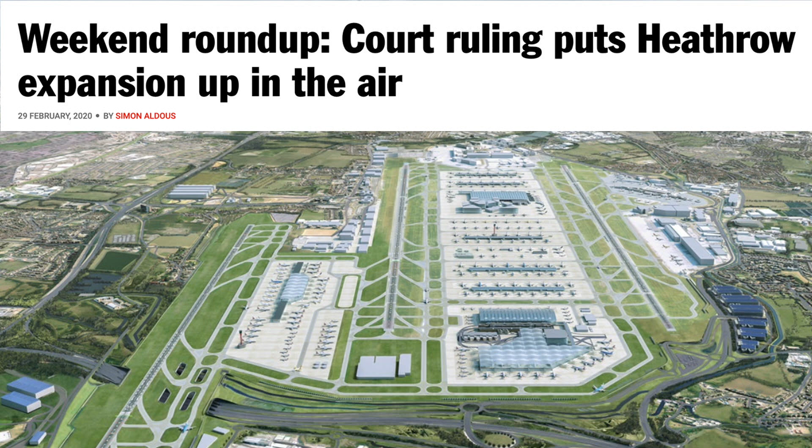Last Friday's news. So these really are quite different times for different people, a different sensibility. And even FutureBuild's branding is what it's all about.

And we have lots of organizations springing up out beyond the construction industry, but one of my favorites is close to my heart, which is the Architects Climate Action Network, who've got a stand across the way there.

Now, we now live in an environment where 75% of the population live in local authority regions that have declared a climate and ecological emergency. Now, if you work for those local authorities, your members are demanding a response to that, because they haven't done just a declaration. They then said, we're going to be net carbon zero in a decade, which is obviously impossible, but it's an ambition that's noble enough. And those local authority officers are running around at the moment saying, what the hell do we do?

So why should we care? Well, I care for these reasons. And I'm a bit scared about this sort of stuff. And this is a map I nicked from Vivienne Westwood.

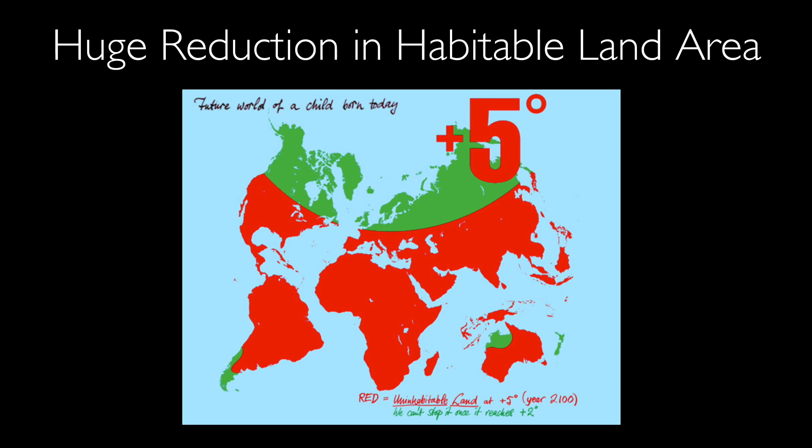And it shows what will happen to planet Earth quite crudely, very simple diagrams that I can understand, if we don't do anything. And we are not doing anything at the moment. We're thinking about it. And you can see that the red stuff is uninhabitable, and I think it's inaccurate because I can't imagine anything in Australia is going to be inhabitable if they don't do something soon, very quickly.

So why us? Well, in the UK we consume 600 million tonnes of stuff a year. Every year we generate 200 million tonnes of waste.

60% of that, or 120 million tonnes, is the construction industry. 45% of all CO2 emissions are the construction industry - the design, the building, the maintenance, the occupation, the demolition of the built environment. The construction industry also consumes about 50% of all raw materials that are mined and harvested every year.

So what next? Well, a lot of people are doing a bit of that. More people are doing a bit of this, and this is interesting because this is a cartoon my partner Ian Mackay did in about 1996 or 97, and we're using it a lot again. But I think some people are doing this.

Can we really afford to save the planet, or our bit of it, the bit that we live on? So from my point of view, humankind needs to learn how to manage planet Earth's resources, and it's all about that. And I think that it's designers and constructors and makers who are the managers of resources.

We manage resources. We choose what things are made of. And the talks that you're going to get during this day of people who've made very clear decisions about the specification of the stuff they'll use to make the things they want.

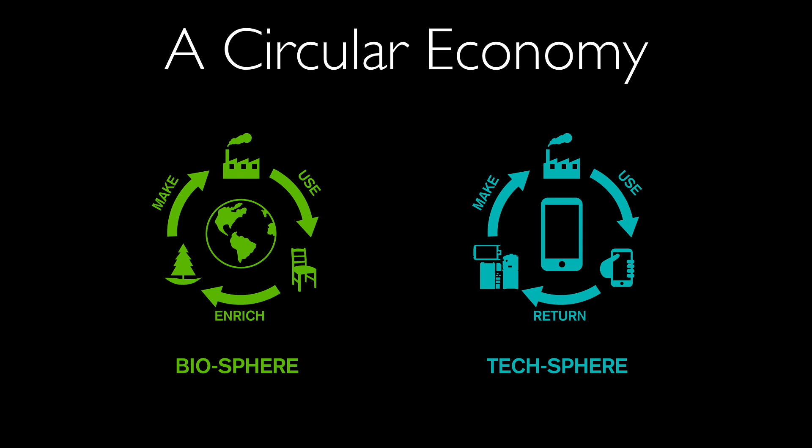So we have to drastically reduce our reliance on raw materials. And I think the circular economy provides many of the answers, and we'll be talking about this during the day today, where you turn those linear take, make, and throw away systems back on themselves so there's no such thing as waste, just stuff in the wrong place, and waste is actually not a word we use anymore, it's just a resource.

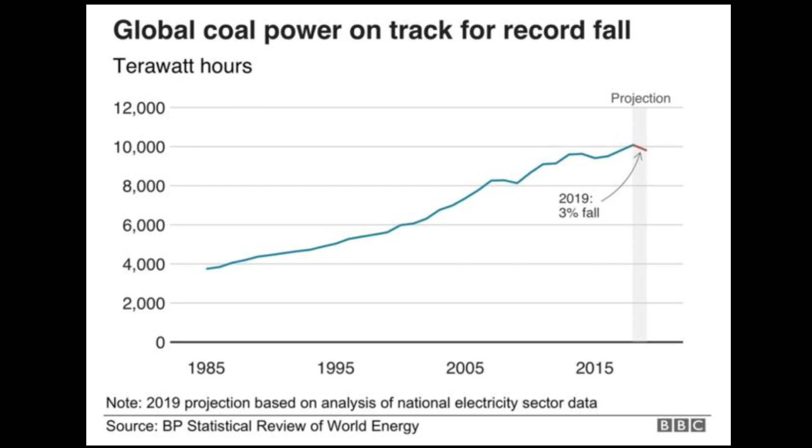Nobody's wanting to invest in coal anymore. And I think it's our city-states that are really going to move things forward, because that's where everybody lives, that's where all the stuff comes together, and that's where all these linear systems are near each other and can start to join up.

What I'm talking about, to conclude, is this idea of mining the Anthropocene—working with either replenishable organic material and nurturing the natural world by doing that, or more importantly, reworking the stuff that's already been made by humankind.

We're in a world where there's more gold in a ton of iPhones than there is in a ton of the best gold ore. So why are we sending people down underground? There's more copper above ground than below. It's above ground, it's the Anthropocene, the human-made layer of stuff that wraps planet Earth.

So mine the Anthropocene, close down the conventional mines, and nurture the natural world. And stop making sustainability the Mickey Mouse issue—this was a really good slide by someone working for the World Bank. I was at the Major Projects Association last summer.

I think we've got a different set of criteria. Consider refusing projects, Grimshaw and others, before you reduce the amount of materials you consume in your day-to-day business, before you start reusing, before you recycle, before you start specifying new materials. Our biggest challenge is not changing today.

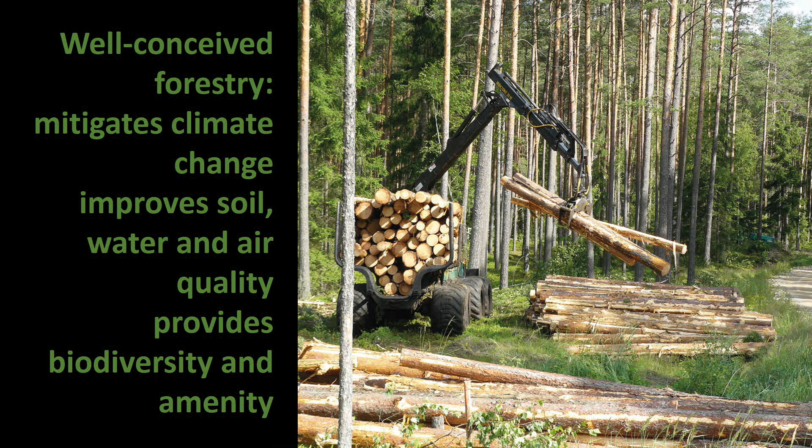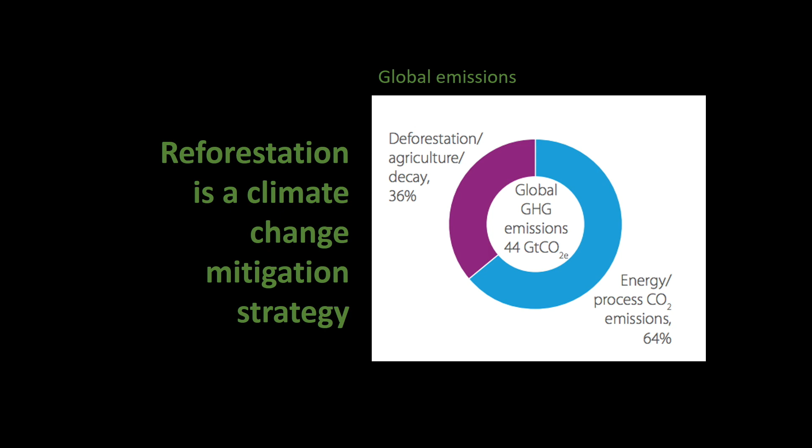So what's not to like? I challenge anybody to say it isn't part of the solution. And if you have any doubts, here's an interesting little pie chart. It shows man-made climate change, two-thirds being caused by burning of fossil fuels, one-third being caused largely by deforestation across the planet. Gives us a bit of a clue that trees might be part of the answer.

So I put it to you that timber is the exemplar material for modern, high-performance, critically healthy, low-carbon construction. People like to live in wooden houses, not just from the aesthetic aspect, but also the breathability of the timber and the systems create nice, good acoustic internal environments as well. Yes, you need good design, but it's the material that can achieve that the easiest.

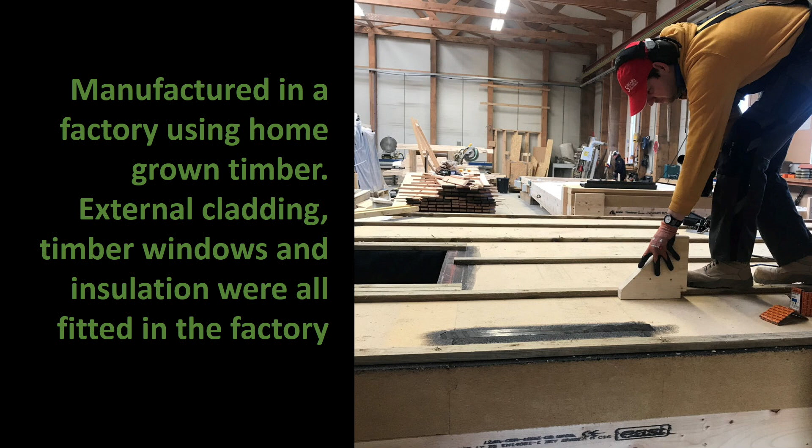Moving to off-site, so manufactured systems, there's quite a few shown here, factory-built, advanced solutions so that you can achieve passive house levels repeatedly over and over again, rather than reinventing a house every time we build one. We're moving to that. That can be done now, and is being heavily promoted in Wales.

The thing about using wood is it does two key things in terms of climate change, leaving aside the trees, which everybody knows is the only carbon capture and storage system that works on the planet. So, but by using timber, you displace the high carbon intensive materials.

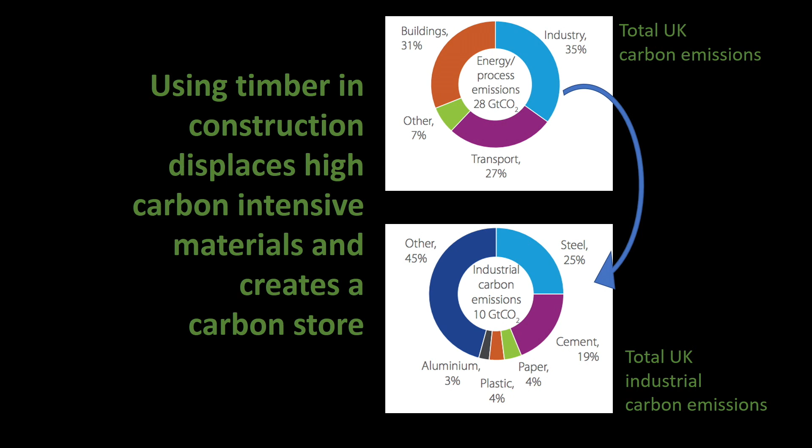The bottom one breaks down those industrial emissions into the different material sectors. And as you can see, steel is 25% of our industrial carbon emissions. Cement, even though we're largely a deindustrialized nation and not now producing much cement compared to China and other developing nations, is still 20% of our national material carbon emissions. So that's quite staggering. So it also gives a clue as to where some of the problems are. Now, this is a little bit tongue-in-cheek, and you could add glass to this list.

You know, these were the wonder materials, and are still the wonder materials for our industrial world. They give us all this utility, but should we be using them in low-value, high-volume applications? Should we be using them without thought to their carbon intensity?

They're fantastic, we need them. Steel, we clearly still need steel, but we need to use it more thoughtfully. We need to use it and reuse it, design for its reuse. Cement, we need to use less of it, using it only in those applications where nothing else will do. Plastics, clearly, well, that's highly topical.

Glass, you could add to the list. Should we be producing glass facades? Massively high carbon intensive facades that have about a 40-year life? No, we shouldn't. Windows, yeah, but not big glass facades.

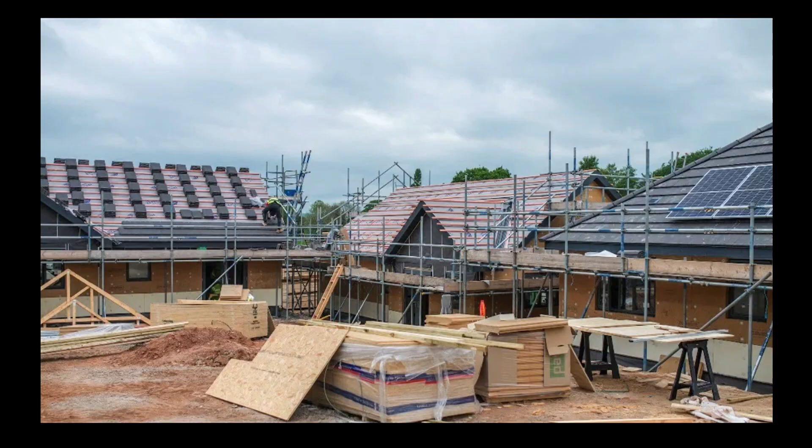So I want to finish up with a little project that we're working on in Wales. Wales is getting into this agenda in a big way, thanks to Wood Knowledge Wales, where we're bringing together public housing developers who build 1 out of every 3 houses in Wales, soon 1 out of every 2, committing to using timber and committing to delivering net zero carbon.

So this is a project, not a very good picture I have to say, but it's a project we're working on: 37 houses in Wales, a medium-sized development. This is phase 1, phase 2 starting next year, based on homegrown timber, wood fibre insulation, timber windows, local timber cladding, built to standard costs.

And what we're doing now is measuring the performance, both in terms of operational carbon and embodied carbon. We haven't done the operational carbon yet because they're not occupied, but embodied carbon we have.

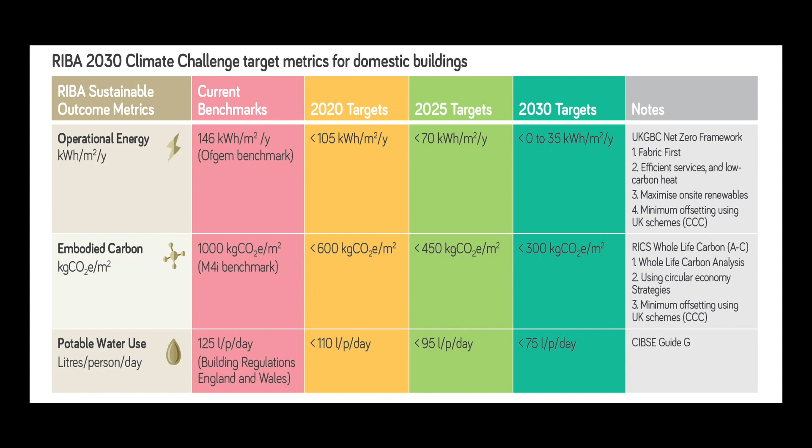These are the RIBA 2030 Climate Challenge target metrics. If you look at the embodied carbon, which is the middle row, we're particularly interested in the 2030 target for embodied carbon, which is less than 300 kilograms of CO2 per square metre. For the project I've just shown you, we beat that quite substantially, about 20%, using timber.

And I can't prove this to you here, but an earlier presentation on a stand said that timber frame, and using natural insulation, is the only way that we can beat the 2030 RIBA challenge target. I don't know about that, because all I've done is measured the project that we've worked on.

Embodied carbon is pretty significant, right? These show that on this particular project, it's about 50% of the total whole life carbon emissions from a project. So embodied carbon is unregulated, but it absolutely should not be forgotten. If we're going to deliver net zero carbon, we have to massively reduce our embodied carbon.

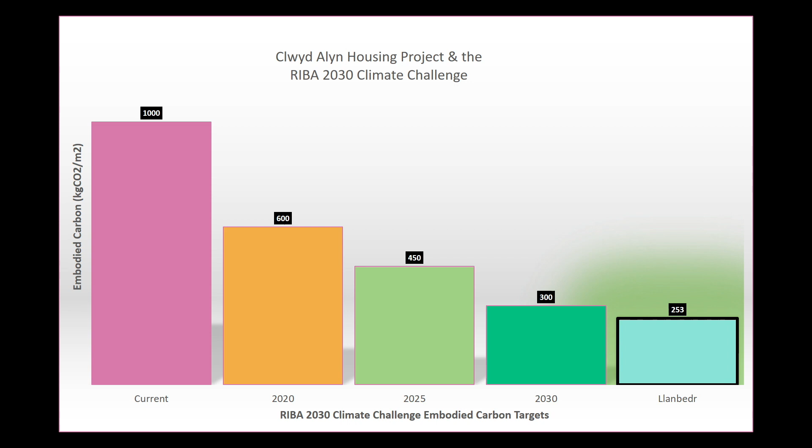And I would just mention, on the housing project we're working with the Housing Association, who are going to plant trees to offset their embodied and operational emissions over a 60-year life. We've calculated that the cost of buying the land and planting the trees is about 1.5% of the total development cost. So it ain't that great, it certainly can be done.

Just to finish up, I've got a minute left. I want to fly through some technical innovations which some of my colleagues speaking after me will talk much more about. But we're starting, in my opinion, at the golden age of the use of timber in construction.

You've probably seen projects made from this material, CLT, not just low-rise but also medium-rise projects, that replace nearly all the concrete you'd typically see used in construction. A colleague from Waugh Thistleton will talk much more about this in a moment.

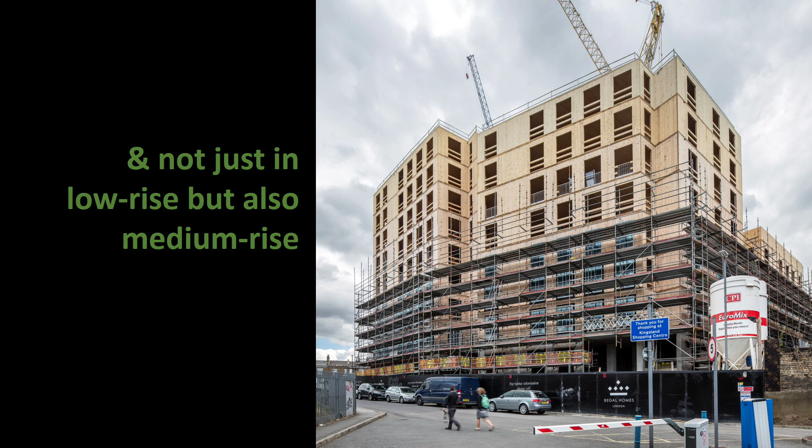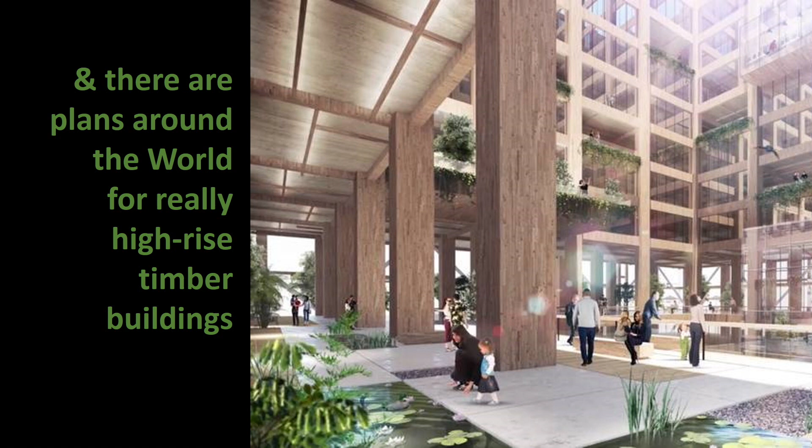We're also starting to explore ideas about super high-rise. This is a theoretical project, I don't think it's built, this is Sumitomo Forestry in Japan, but it gives you an idea of what might come. And we're not just talking about the structure, we're also talking about the insulation. There are also fantastic innovations in joinery, which a colleague will talk about shortly, making wood a much more durable material for window manufacturers and other external environments.

So, yeah, I would say wood is highly sustainable, and it is the only advanced industrial material available at scale right now that we could use more of and mitigate climate change at the same time. It's the material for the climate emergency. Thank you.

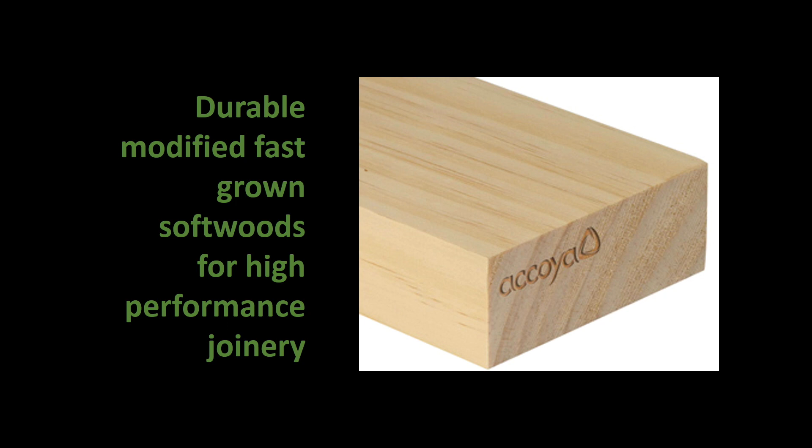Amazing facts and figures. Thank you.

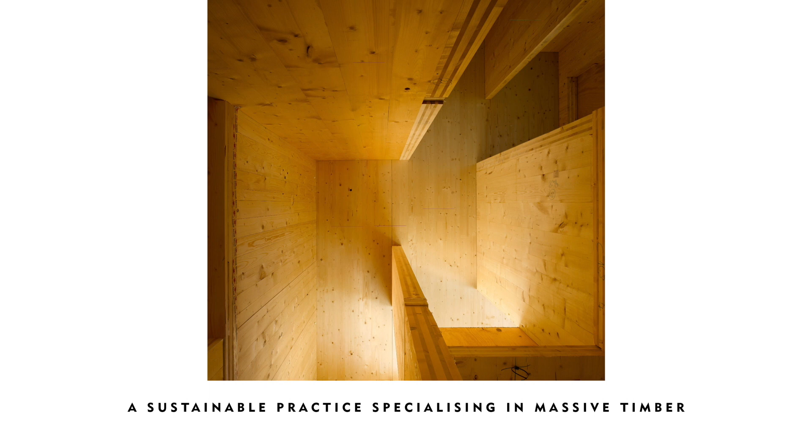Welcome, everyone. My name's Alistair, I'm from Waugh Thistleton Architects. We're a small practice of architects and problem solvers in Shoreditch, London, where most of our projects are inner city projects, offices and houses, and we specialise in trying to find the most sustainable way to design those projects.

Over the years, we've found that typically the answer to deliver the most sustainable project is to build in timber. That's led us to become world experts in building tall timber, and now we consult on building tall timber all around the world.

When we get a project, we look at it from the outside: what can we do to reduce? Do we actually need as much material in the project? Do projects need to be as big as some clients' ambitions set out for? What can we do to reuse as much material already on the site? What can we do to reduce the amount of material, and what can we do to enhance the project to allow it to be easier to recycle in the future?

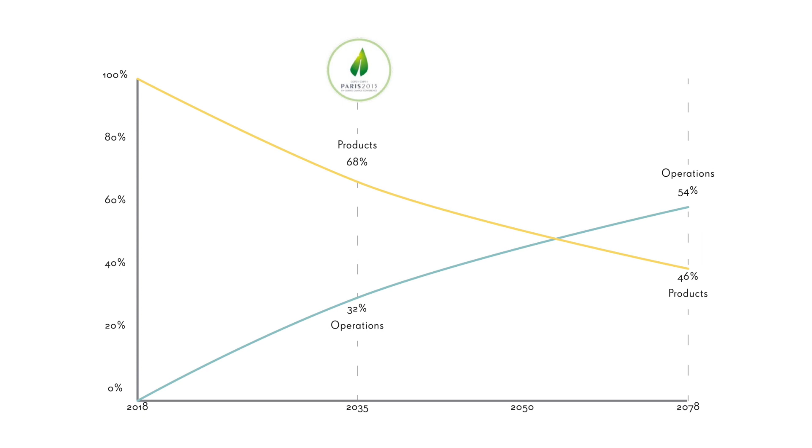Our main focus with carbon has been on embodied carbon, or as I'm increasingly hearing it called, upfront carbon. If we're to hit targets for 2035, 2040, 2050, whatever year people pick, these are really soon targets. We need to be worrying about what carbon we're producing today and what carbon we're using over the next 30 years. So we've really focused on how we cope with embodied carbon and how much carbon we can save today.

So why do we select timber for most of these projects? Because it's a renewable material. The forest absorbs CO2 from the atmosphere, gets turned into logs, processed into modern mass timber products, which can lock away that carbon for over 100 years into buildings. Once those buildings are demolished, the materials can be graded, recycled and reused, and those that can't be used for generating low energy, where the CO2 created feeds the forests. So it's a cyclical, recyclable, renewable material.

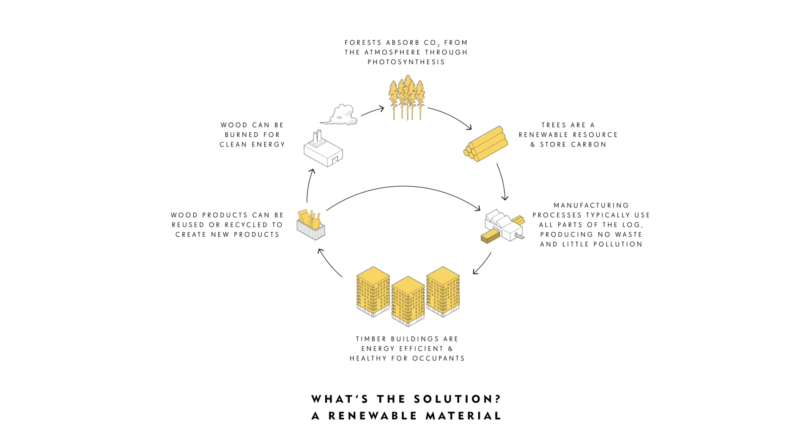So how much carbon can you actually look to save in a project? Some of these figures are based on A1 to A3 in a life cycle analysis. We've created a building typology designed as efficiently as we can in set materials—designed in timber, in steel, and in concrete—to show you the difference between the materials.

If you don't count any of the carbon sequestered in the timber—any of the carbon the tree has taken from the atmosphere, put inside itself, and locked away in the building—timber still has significantly less embodied energy than concrete. These figures are in kilograms of carbon equivalent per metre squared: timber is 180, concrete 220.

But if you do count the amount of carbon sequestered in the timber used in the building, you get a significant difference in how much carbon you're saving. You've got to consider how much carbon the trees have taken out of the atmosphere, locked in the timber, and then locked away in the building.

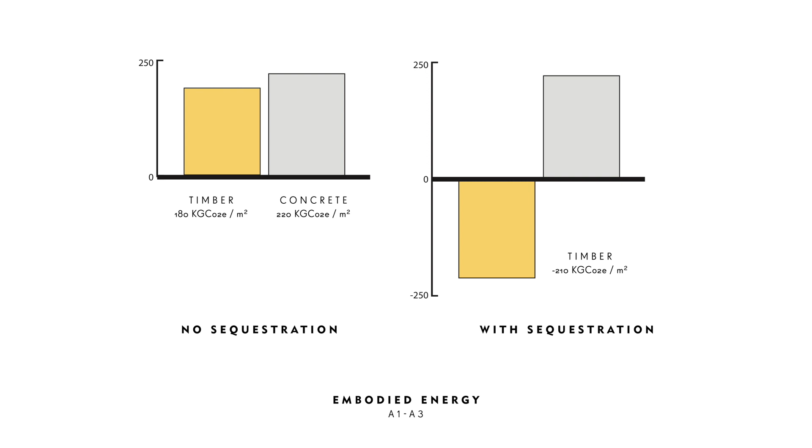What's also never counted is that if you're using timber from sustainable forestry—which is what we all specify in the UK, as it'd be very tricky to specify a CLT building made of non-sustainable timbers—typically FSC or PEFC state you need to plant at least one tree, typically two, but well-maintained sustainable forests actually plant up to five trees for every tree chopped down. So in that 100-year lifetime, even in 30 years, this chart shows how much carbon is sequestered in the two extra trees planted during the building's 30-year lifetime.

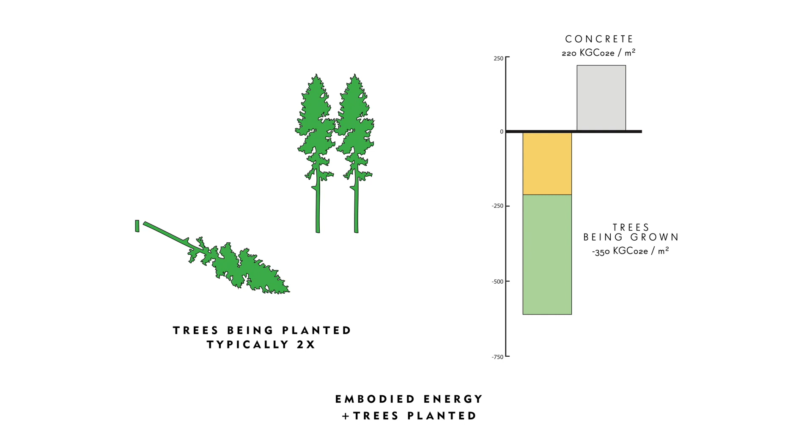And then, because we're not building a concrete building or a steel building, we're actually saving all that energy from carbon ever being spent. So the real carbon saving from building a timber building can be dramatic.

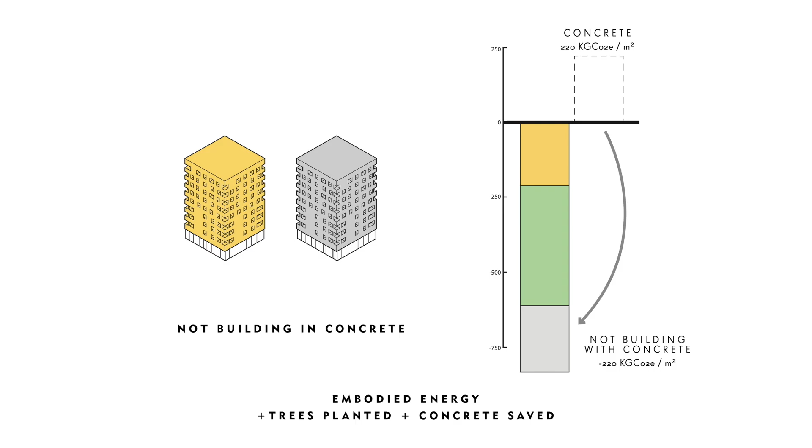So very quickly, what is CLT? CLT is taking standard softwood planks of timber, different species can be used, at different standard plank formats, and then cross-laminating them, sticking them together with glue under high pressure in alternate directions. This allows great stability and strength in panels, and means you can have panels of great sizes and thicknesses, providing great strength from small materials.

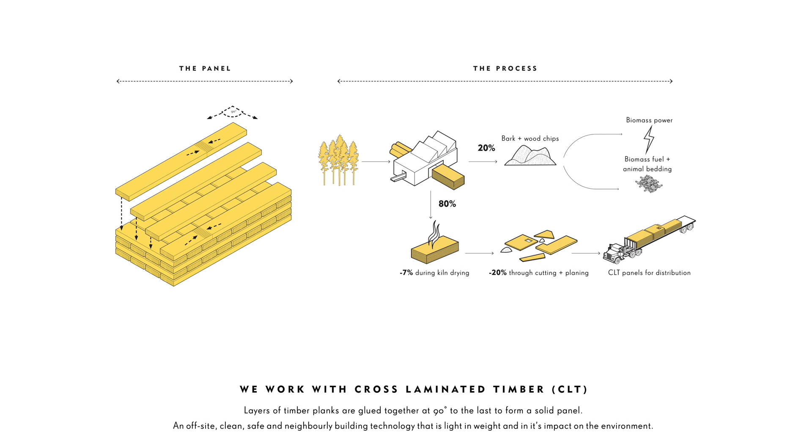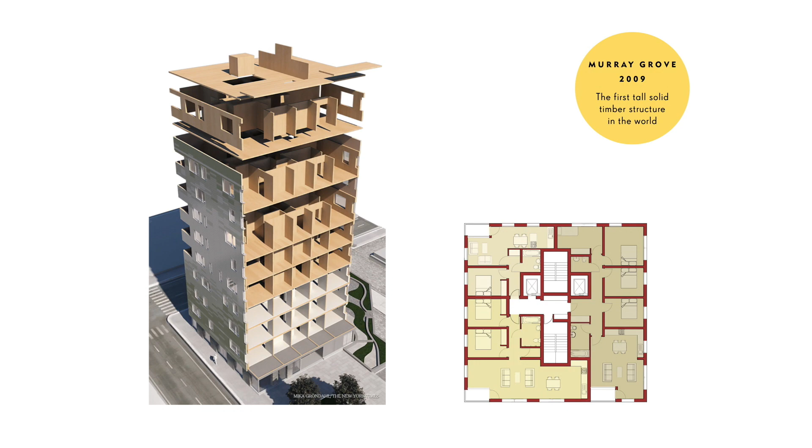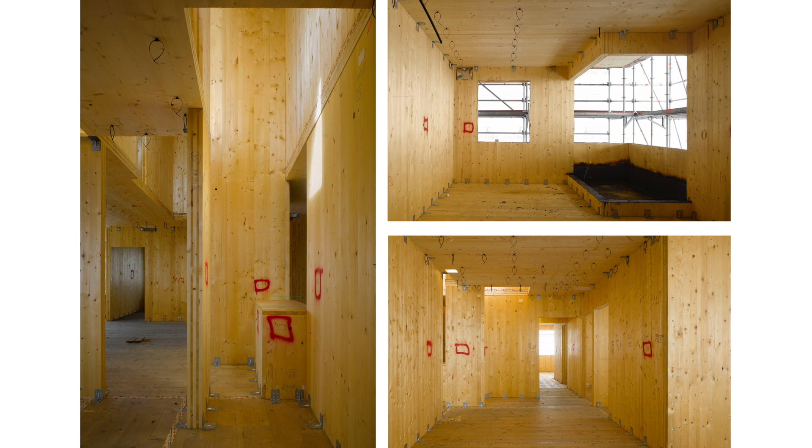In 2009 we finished a project called Murray Grove, 29 homes built all out of CLT in a honeycomb structure style, where all the walls are the same thickness, made from CLT. It took 49 weeks to complete, with 29 homes finished. It was quick to fit out because most of the internal walls were also structural, so when the main structure went up in 4 or 5 weeks, a big bulk of the work was already complete.

Since then we've been learning and creating more homes, but unfortunately the government changed the rules on how we can use CLT in buildings, so we've had to adapt how we design. We wouldn't be able to design this in the same structural way now, but what we're doing on current projects is making sure the facade is non-load bearing and completely non-combustible, while the rest of the structure is made out of timber.

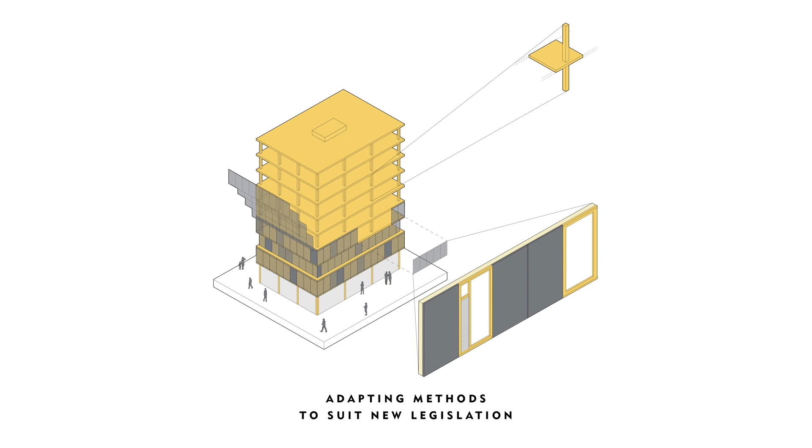Because we work in central London for commercially driven clients, it's only been recently, since the climate emergency has come forward, that clients have actually asked how to develop a sustainable building. Typically all our projects have been designed in timber because of the other commercial benefits, like delivering a 20% quicker program and up to 85% fewer deliveries, meaning less transport congestion in inner cities and lower transport costs.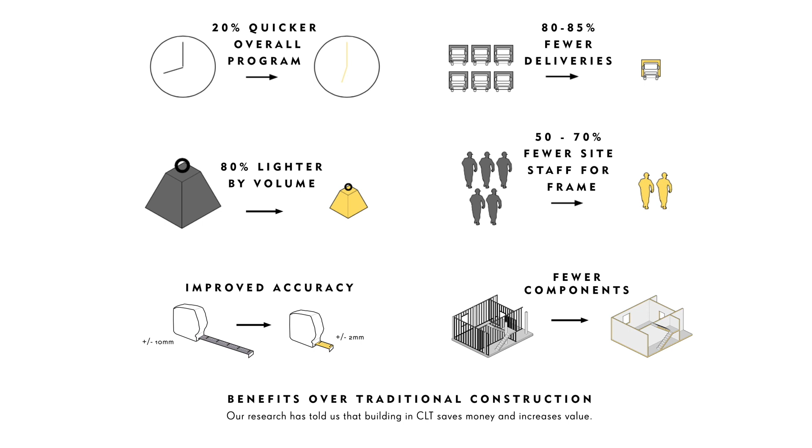It's also 80% lighter in volume, which meant for a building like Dalston Lane, built over a tube station, that if it had been built in concrete it only could have been 4 stories tall. We were able to deliver up to 11 stories because it was so much lighter. In concrete we'd have needed long pile foundations that would have interrupted the subway route, but instead we delivered the much lighter building on a concrete raft.

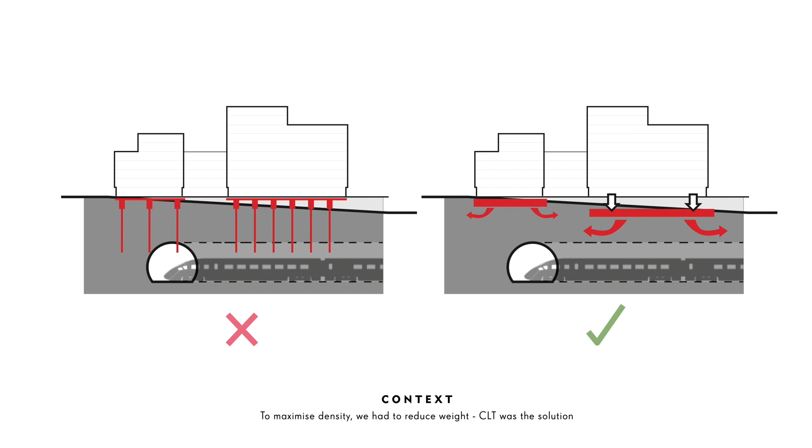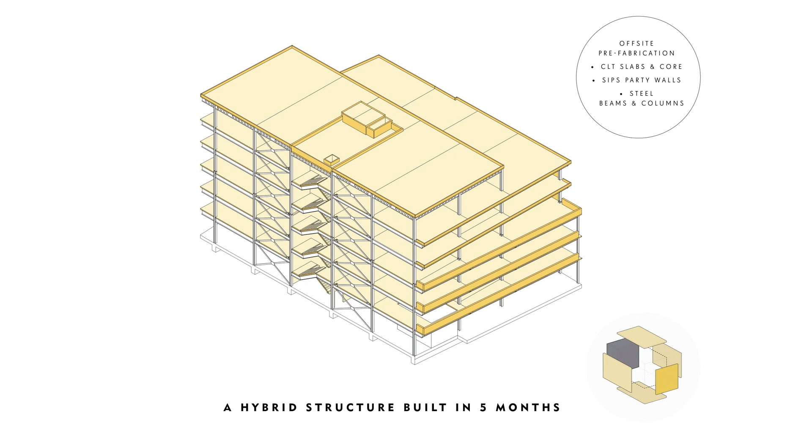This is a building we've just completed in Shoreditch, an office building using a hybrid of steel and CLT, where we try to use as much timber as possible. We used standard sections and bolted connection steels so the building is easily demountable, and when it is demounted, the steels could potentially be reused.

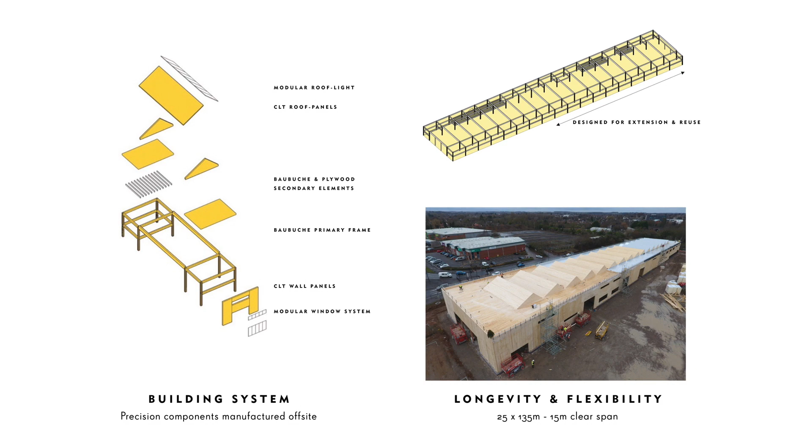This is a building we created for a furniture manufacturer called Vitsœ, where we worked closely with the client to develop a systemized factory building they could extend and demount over time. They hoped to build only 9 bays initially, adding an extra bay as the company grew and needed more space, all designed with them out of timber. As the project grew though, they decided to build it all in one go, which was a little unfortunate since we didn't get to test the growing and shrinking mechanism.

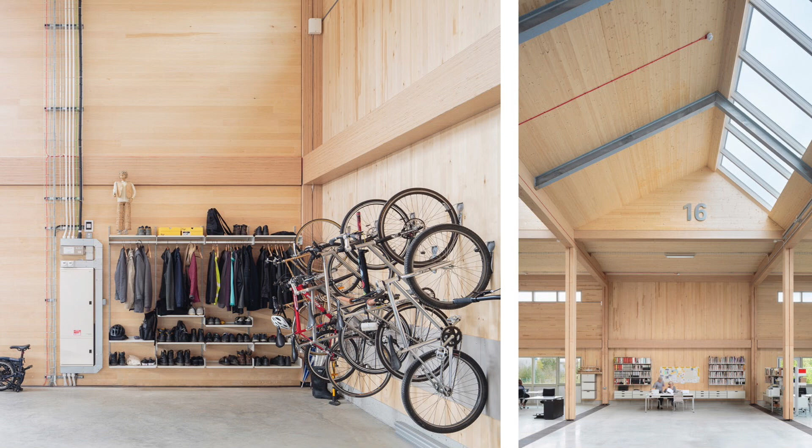This building uses a mixture of timber species in a typology that's typically steel and plastic, and we've been able to deliver a highly sustainable timber building instead. Some more pictures inside show it's a really nice place to work, so comfortable and serene to be inside. Everybody who works there loves it, I'm a little jealous I can't work there myself.

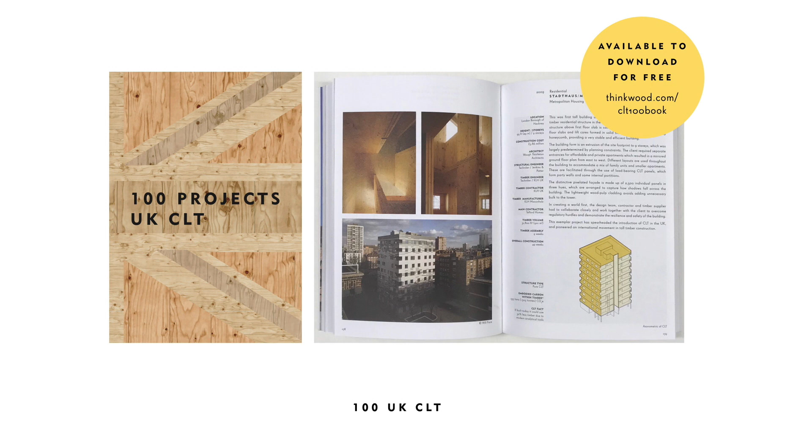While our government is currently trying to make it harder to build out of timber, internationally there are big strides to making more and more people take timber as their number one choice, looking for reasons why you can't build with timber rather than why you should. Actually, the conversation should be reversed, and everybody should be asking themselves why are they not building in timber.

The French understand this, the Americans understand it, the Australians understand it. Everyone's looking at how they can build more with timber, and we need to be doing the same.

Here's a little comic, which you can also find on our website, trying to explain how CLT can save the world. The idea is that we can create long-term carbon stores in the homes we live in and offices we work in, and encourage afforestation, so the more timber harvested from sustainable forests increases demand for timber, meaning more trees are planted and more carbon is sequestered. Then we can actually start making a significant dent into the carbon sequestration we need.

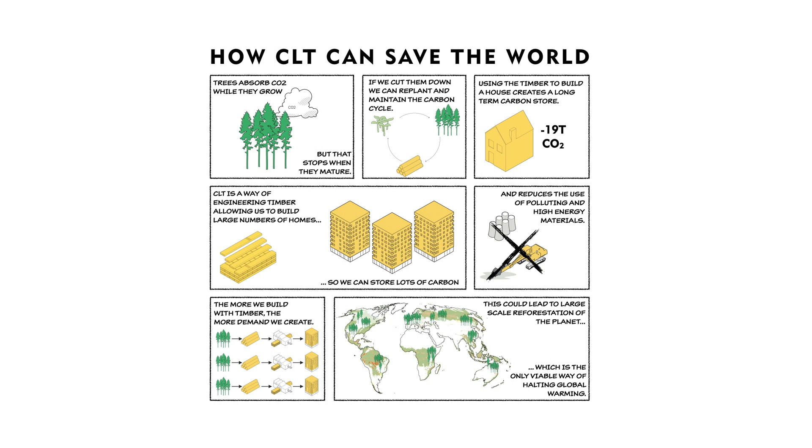Great, thank you very much. Thank you, Alistair. I think it's really interesting, a relatively small practice having a huge impact on the built environment and the world of design at the moment.

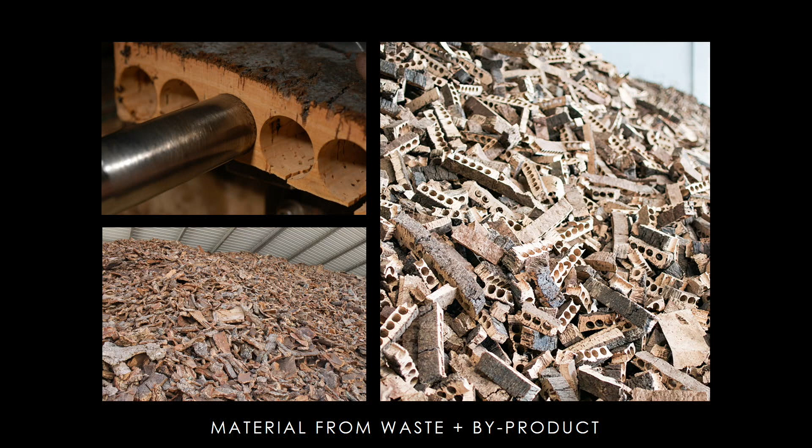The best cork from the harvest is used for the wine stopper industry, which then generates quite a lot of waste. And also there's a lot of general low-grade waste from the cork forestry industry, which isn't usable by the wine stopper industry.

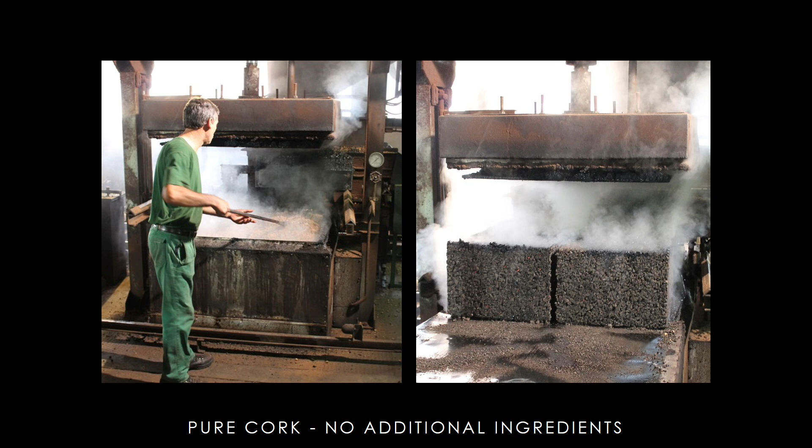That waste and byproduct cork is granulated, then cooked in big pressure cookers using dry steam at about 360 degrees centigrade, which is generated using waste biomass from the cork industry. As it's cooked, the granules expand and release a natural resin in the cork called suberin, which melts and bonds all the granules back together.

The lovely thing about expanded cork, different to agglomerated or composite cork which you see around lots of household products, is that expanded cork is a pure, biorenewable, plant-based engineered product. It's only made of 100% cork, no additional ingredients or binders whatsoever.

Because of that, it's already sold as a form of soil aerator, because it can be put straight back into the soil to biodegrade. As a result of that material life cycle, it's something approaching a cradle-to-cradle material, perhaps, where it comes from the forest, is used in the technical cycle as a form of engineered, pure plant-based material, and as a result can go back to the forest and regenerate new growth.

So those are the sort of characteristics that we were interested in maintaining through the life cycle of the building, throughout its use in the technosphere, if you like.

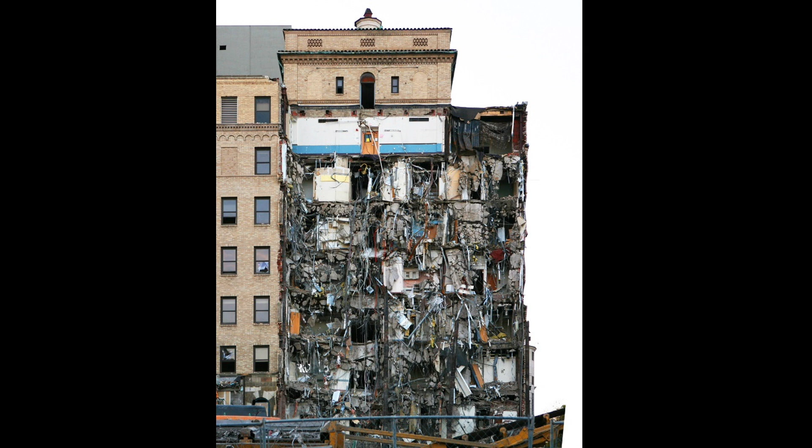A lot of contemporary construction ends its life like this. And that's largely down to the way that we have come to think about the way that we make buildings and put materials together.

It's always interesting, people talk about their brick house, and of course a lot of people know that brick houses are in fact an agglomeration of a whole range of interesting materials, from cement-based blocks, petrol-based foam insulation, foils, cement-based mortars, membranes, plastic insulation, and so on. This creates a complexity throughout the whole of a building life cycle, not just in terms of tracking resource impacts, but also at design stage, through to on-site complexities of sequencing and interfacing, aggregate performance in use, and particularly at the end of the building's life.

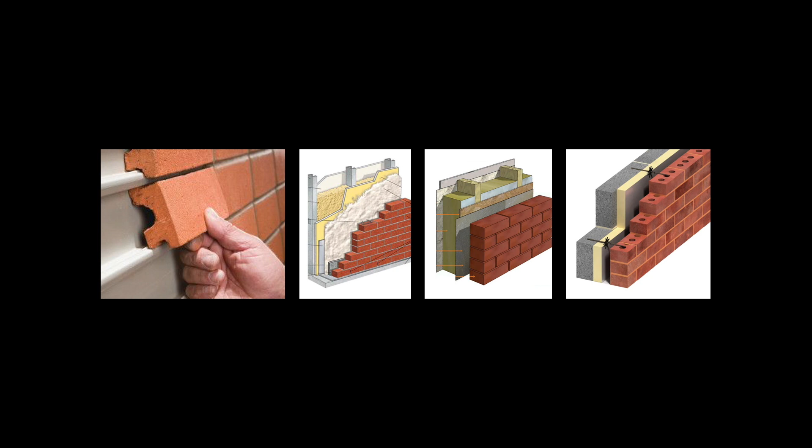We characterize that way of thinking about buildings as a complex, layered building envelope, where each function that the building envelope has to perform is fulfilled through a different product or layer, if you like. So structure, insulation, cladding, weather tightness, air tightness, internal finishes, and so on.

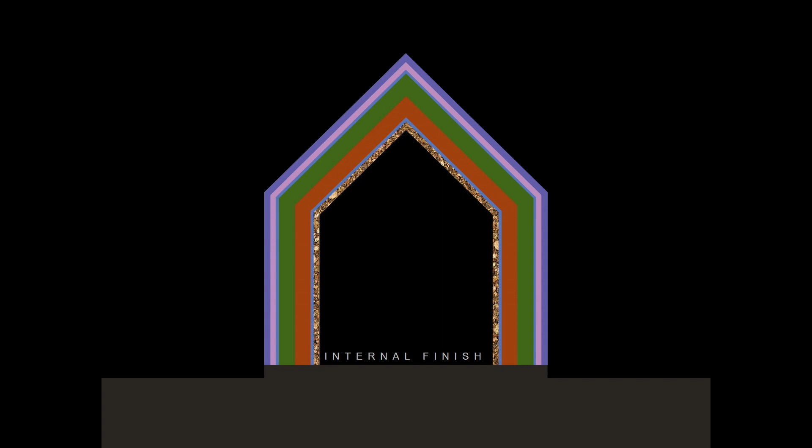The hypothesis for the project was, could we replace all of those individual layers with a single plant-based material, expanded cork. So from internal finishes, external cladding, insulation, its main function, load-bearing capacity, and also the transfer of moisture across the building envelope. It's a breathable form of insulation.

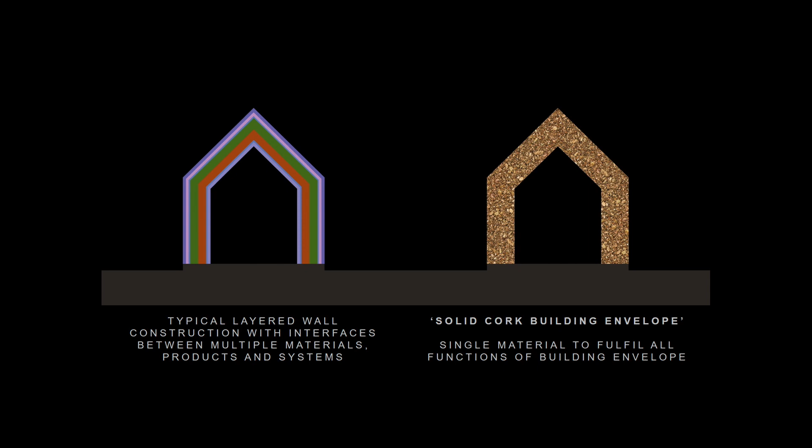The approach started with a very simple idea of big blocks of cork that are machined into a tongue and groove system, interlocking system, friction fit, a kind of giant organic Lego system, if you like.

One of the interesting things about trying to use a single material across the whole of the building envelope, and it sounds like a really simple idea, but simplicity and complexity always have quite an interesting relationship, is that in order to maintain that material simplicity, we were asking that material to do a whole range of jobs, and that ended up with quite a complex block geometry.

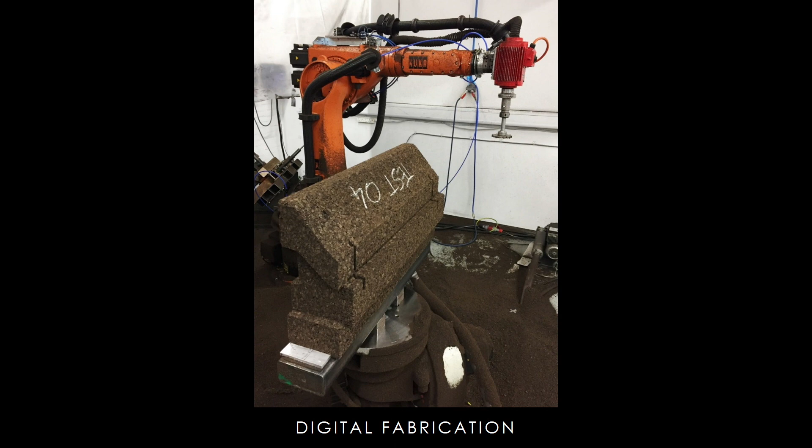So then we had to turn to a form of digital fabrication, to address that level of complexity of machining, but also what this enabled was a very precise form of fabrication. So it meant that we could actually think about using this system as a dry jointed form of assembly, which is essential in relation to maintaining the purity of this material throughout the whole of its life cycle within the building.

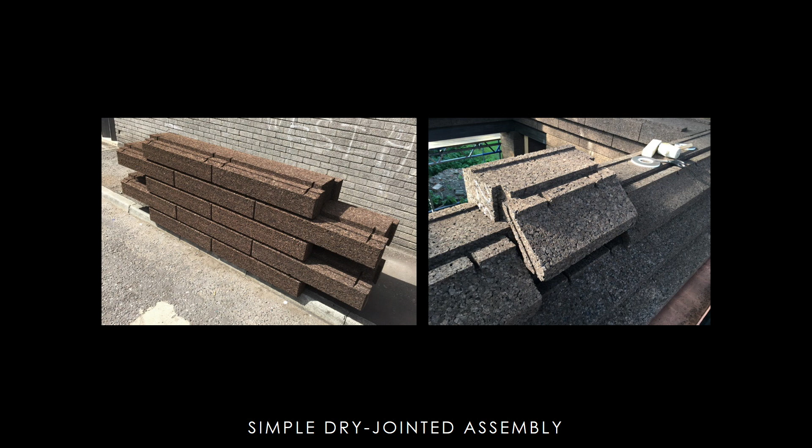On the left is the first section of solid cork wall we developed at the Bartlett using digital fabrication, and on the right is the cork house on site. That's obviously a good day on the right, where everything fitted together really nicely. This building is about 18 meters long, and the blocks have a plus or minus half a millimeter tolerance. On a nice day there's a little rubber mallet, and you just tamp it down and it feels lovely. Of course there were days when it didn't look like that, and other tools came into use.

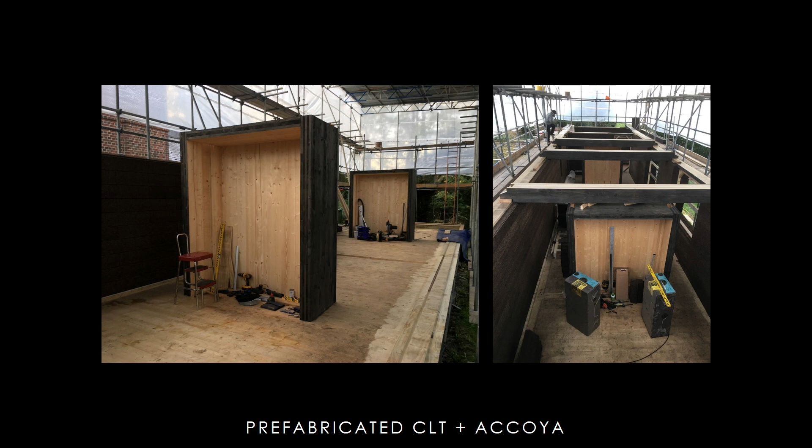The cork system is combined, as I said at the beginning, with a range of timber products. So from spruce CLT for the floor and these structural wardrobes, and then an Accoya ring beam that goes all around the perimeter, connected to a series of Accoya ladder beams. They tie down to these structural wardrobes, and they stop the whole building moving in terms of lateral stability and shear.

This combination of cork and timber and some other elements together formed what we call the cork construction kit, which is a completely off-site, prefabricated kit of parts. We designed and drew all these, sent them off to a range of suppliers and fabricators, and they got sent back to site, and I assembled them by hand on site.

You can see the removable steel screw pile foundations, an Accoya ring beam sits on top of that, CLT floor plates slot into that, cork blocks in compression, and then a ladder beam at eaves level in Accoya, which deals with the shear, and then more cork in compression, and then the roof lights on top of that, which act like paperweights, because there's no glue or mortar in the whole system holding the structural system down. Obviously there had to be something, so they're just paperweights to resist the wind load for those top few layers of the roof.

The form of the building, as I said at the beginning, relates directly to a series of decisions made in relation to the consideration of the life cycle. It's a result of a way of thinking.

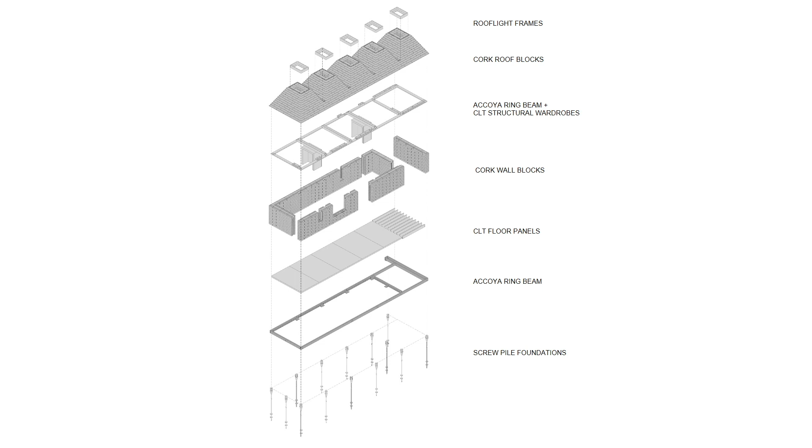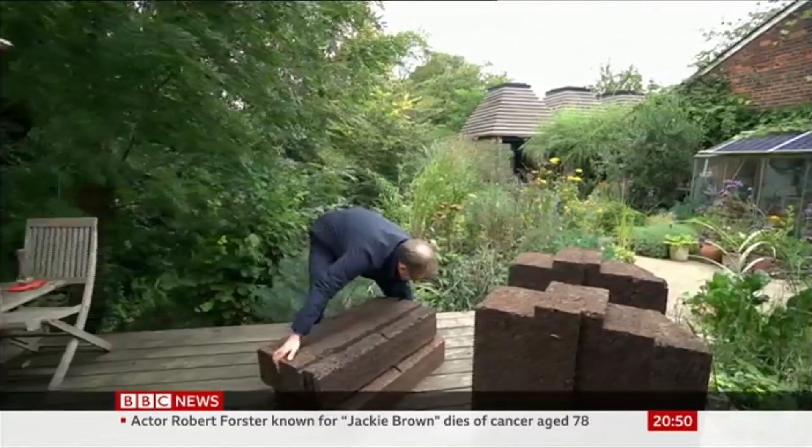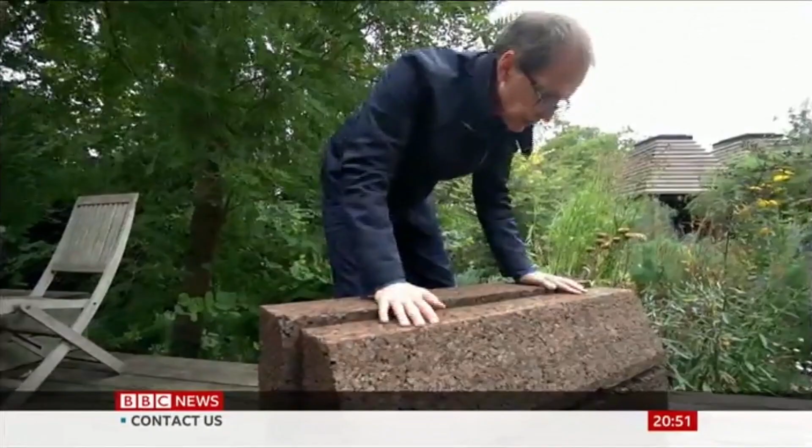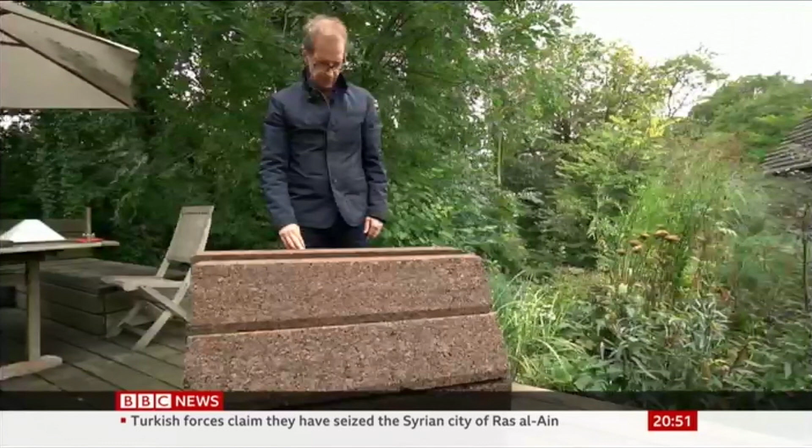I've been told even an idiot such as me can have a go at doing a bit of construction, so let's see if this really is idiot-proof. Oh, it really is like building blocks. This is, I think, a roof. And there we go. In. Up. Out there. I think I've just built a wall. Not brilliant, but that was about a minute, wasn't it? Amazing.

So, as I said, if you think carefully about what you build with and how you build with it, then this end of life phase is the result.

In terms of quantifiable information, it's carbon negative at completion. On the left, a lot of carbon is sequestered in the cork and timber. That's transport—just an interesting note, because all the cork comes from Portugal, and a lot of the CLT came from Estonia. So we lose about half of the sequestered carbon in the raw materials through transport. But nonetheless, at practical completion, it is carbon negative.

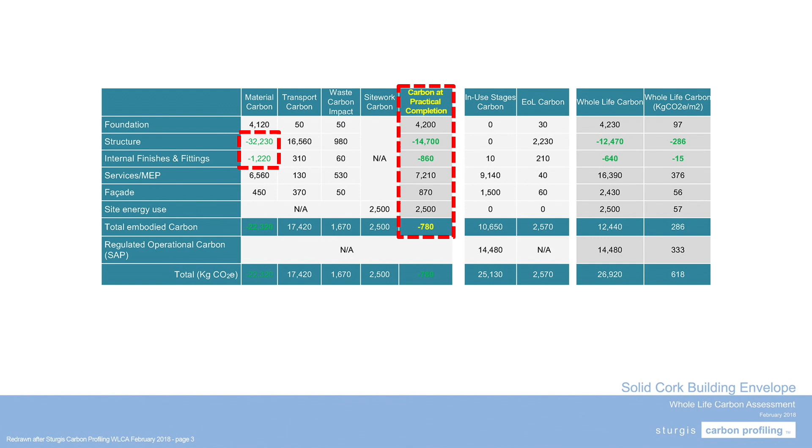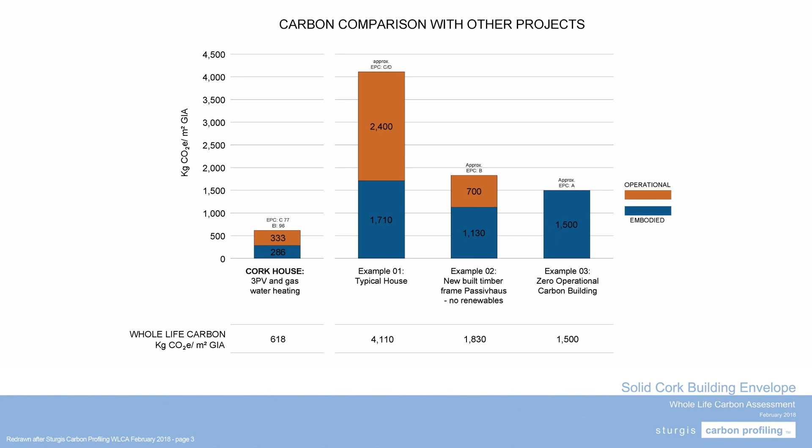It's interesting to go back to what Gary said about the 2030 climate challenge, which is about 300 kilograms of carbon dioxide per metre squared as the target for 2030. Cork House is made almost entirely out of massive amounts of cork and timber and very little else, and at 286 on the left there in blue, it just comes under the 2030 target. So make of that what you will.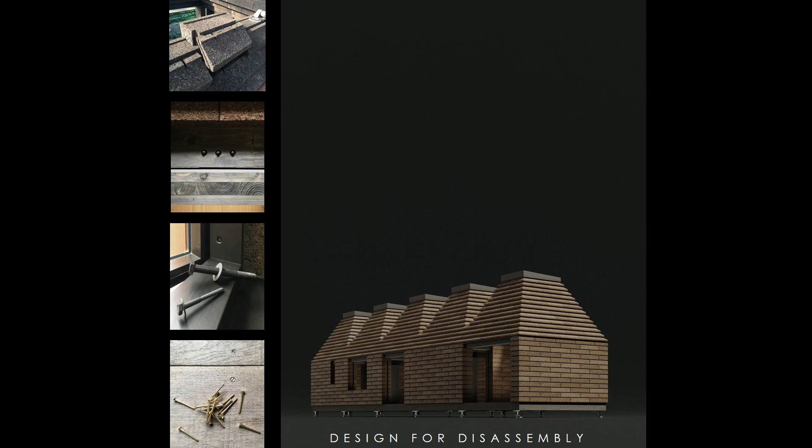How do I get that one to play? No, sorry. No, it should be a video.

There we go. This is a little animation just to convey the idea that it is designed for assembly and disassembly. It's a whole kit of parts that are dry jointed together with no mortar or glue. So all the connections on the left there you can see are all screwed and bolted. Everything is accessible and demountable throughout the whole system.

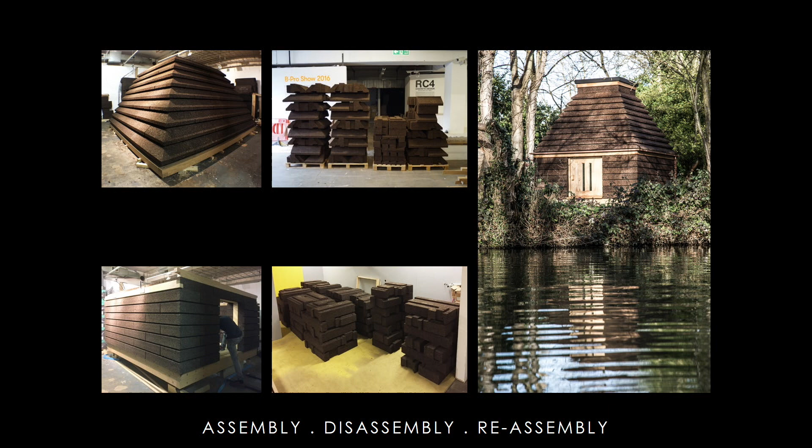And we proved that during the research, where we made this prototype, the cork cabin on the left there, in 2 phases in the Bartlett workshop, and then we took it apart again and disassembled it for transport, took it to site and reassembled it in the form of the cork cabin, so sort of a proof of concept for this idea.

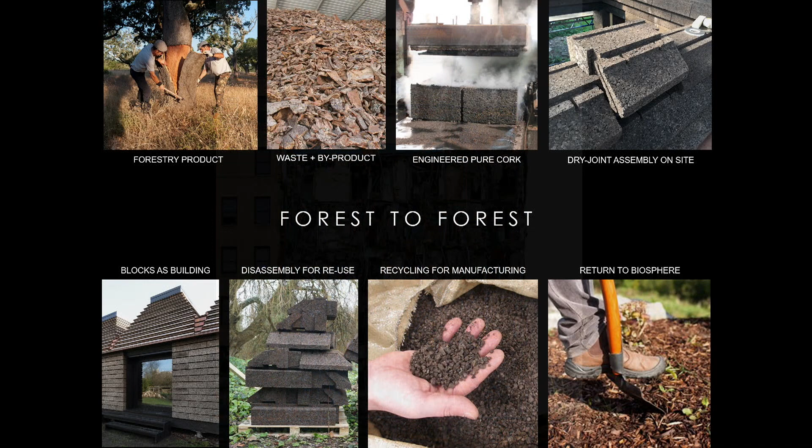So instead of this, you have this, the cork house life cycle, so-called forest to forest. Comes from a biodiverse landscape, made of waste and byproducts, cooked without additional ingredients, put together on site without mortar or glue. The form of the building relates to these life cycle decisions, and then at the end of the building's life, the whole building can be disassembled, the blocks can be recovered for reuse, recycling back into the manufacturing chain, or if there's any waste from that, so-called waste, then it can go back into the biosphere, back into the forest, and regenerate new growth.

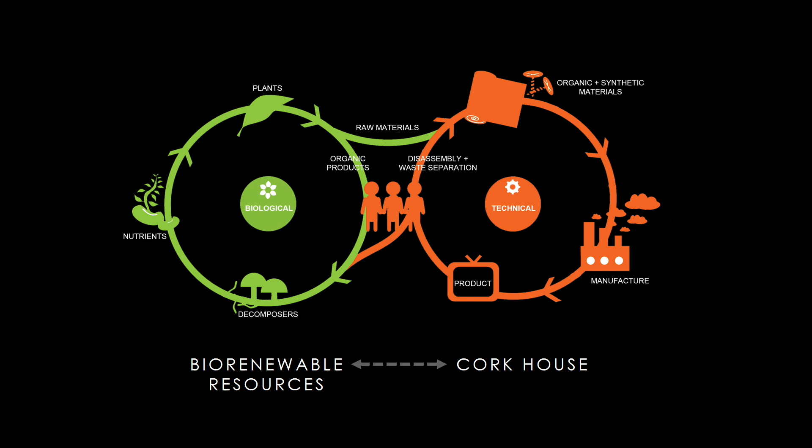And as I said at the beginning, that's what I'm interested in: the relationship between natural resource systems and the production of human culture, using those natural resource systems in such a way that there's a regenerative relationship between those two systems.

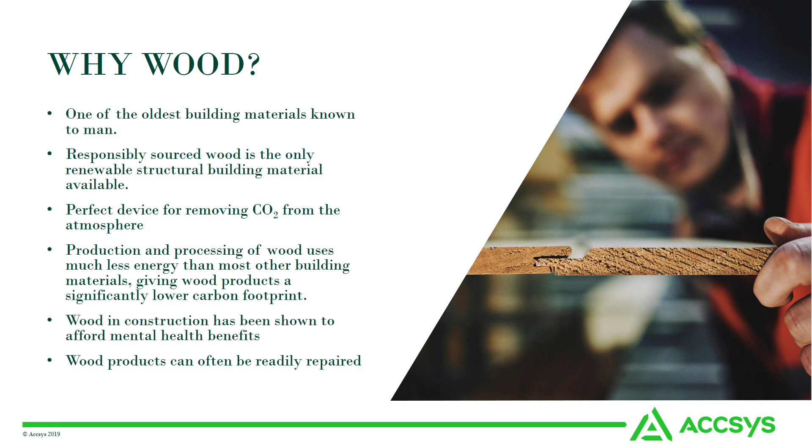And actually the last point is very valid as well, and alluded to by speakers before. End of use, timber can be reworked quite simply and recycled, upcycled, reused. It doesn't have to be thrown into landfill.

So what are the particular benefits of Accoya? In the context of helping with climate change, I guess the main benefit is the durability. We are locking that carbon in for a lot longer than there would be in terms of natural, fast-grown softwoods. Yes, there is a carbon cost to doing that - every process has a carbon cost - but various studies have shown that there is a net benefit. We are locking that carbon in for a lot longer than it would be there, generally speaking.

This is because of keeping moisture out of the cell walls of the wood. Accoya, in any given atmospheric conditions, will tend to have a lot lower moisture content than other timbers, and that has obvious benefits in terms of insulation. So in use, there are benefits to using Accoya windows and doors, for example, in terms of better insulation performance, everything else being equal, than certainly hardwoods and to some degree softwoods as well.

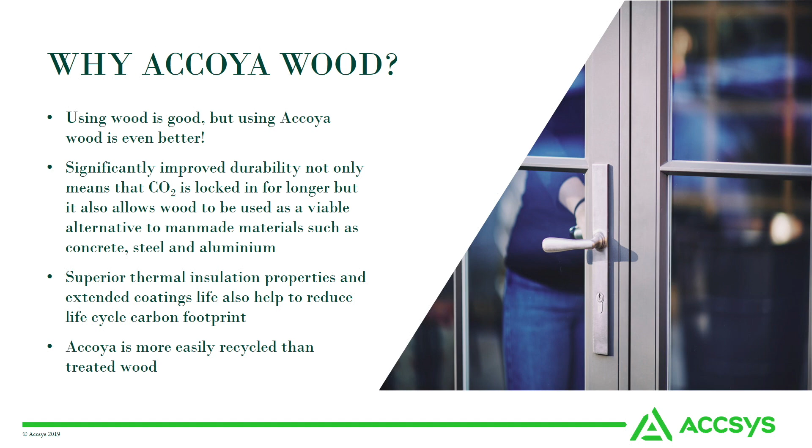We're very proud of the fact that Accoya has achieved overall gold status on Cradle to Cradle, and we're present on the stand to your right. And in terms of the material health side of it, we've even achieved the platinum level, the very highest level. This in itself can lead to benefits under LEED or BREEAM projects.

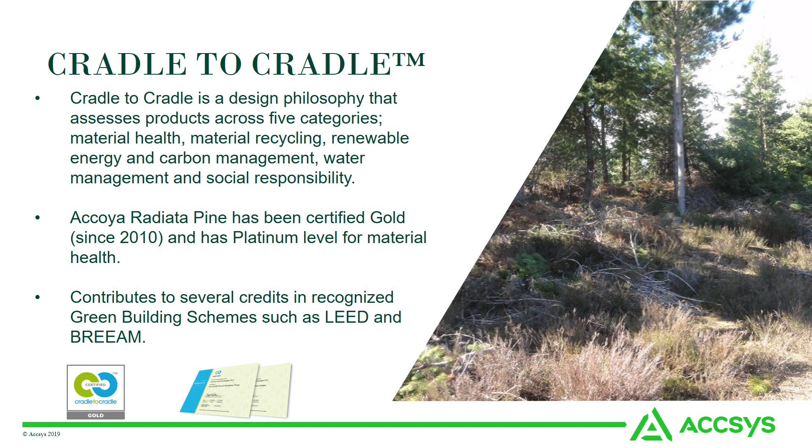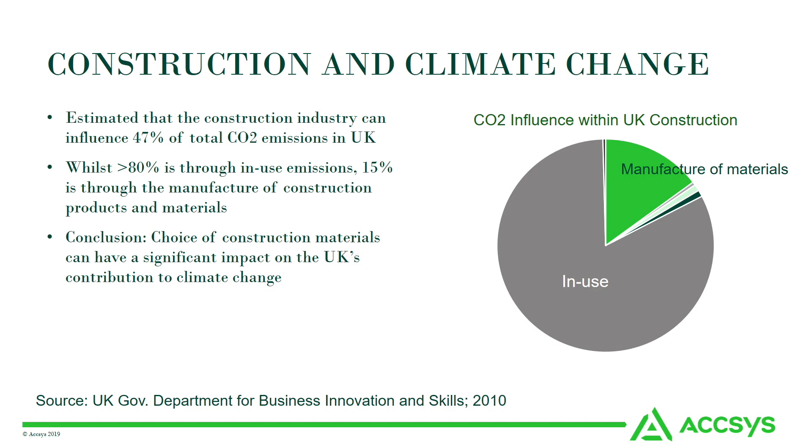Again, I'm repeating what others have said, Gary in particular here, but forests are really important. They're the only natural way on a large scale that we can take carbon out of the atmosphere and lock it up for periods of time. By using wood that is grown in plantations growing rapidly, we are locking carbon up more rapidly than, for example, mature forests. The traditional way of making wood or using wood externally and needing that durability is to use tropical hardwoods.

Now, tropical hardwoods take a long time to grow. They're typically growing 150, 180 years, and then in use, they're only lasting 40, 50, 60 years in general. What our process allows us to do is to use fast-grown softwoods. They're reaching sawmilling maturity in less than 30 years, and from that we're making a material which will last externally for at least 60 years. So you can see we can regrow the trees more rapidly than we're wearing the wood out, and that's not possible with naturally grown temperate or tropical hardwoods, for example.

So there are trees and there are trees, and the mature forests have huge benefits in terms of ecosystems and so on, but they're not the most efficient way of using the wood. Plantation wood grown either for internal or external use is the best way of capitalizing on this ability of trees to capture carbon from the atmosphere.

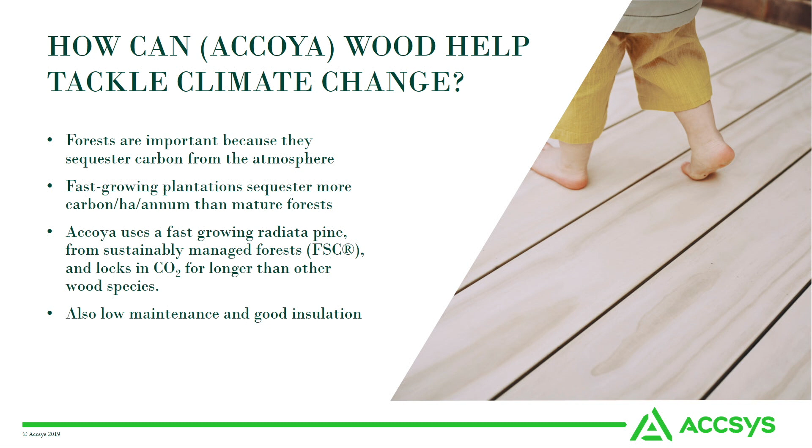Another benefit of Accoya is that the durability and stability means less maintenance. The main reason coatings fail on timber isn't primarily UV light exposure or weather effects, but because the timber substrate underneath is constantly moving with changes in humidity. Coatings have to move with the substrate, which puts stresses on them, and eventually they become brittle and give up, and we've all seen paint peeling off wood. Because Accoya is a much more stable substrate, there's a lot less stress put on these coatings, so they last a lot longer, hence reduced maintenance requirements and reduction in the energy associated with that.